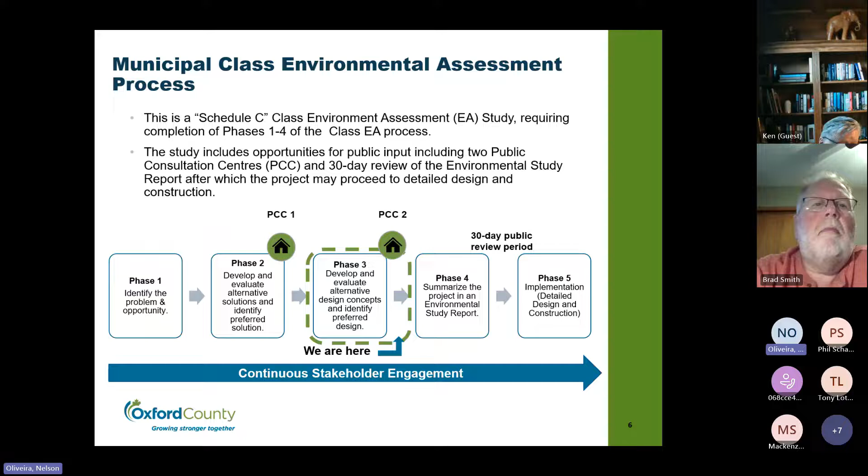All right, I'm going to step a little bit back here. I see a lot of familiar faces, which is fantastic, but I'm also going to step back to explain the system again. Some of this came from the public meeting before, so for those that have seen this, we'll get through this quick; for those that haven't, just want to bring you back on board. At present, the existing system is serviced by 3 wells. Of the 3, 1 is an overburden well and 2 are considered bedrock wells.

We service about just shy of 3,400 people, or about 1,289 service connections within the current settlement area. All 3 current wells are located adjacent to the elevated water tower used for storage, right in the heart of the town. It's not only used for storage, but it's part of the disinfection process, and it also helps meet the peak demands in the system.

The current treatment includes the addition of sodium silicate, used for iron and manganese sequestering. That's something you've got naturally in your water source, as do a lot of systems in Ontario. We also add sodium hypochlorite for disinfection.

Key items related to the existing system include the fact that the 2 bedrock wells, also known as wells 2A and 3, are not allowed to operate at the same time, a condition of the existing permit to take water issued by the MECP, the Ministry of Environment, Conservation and Parks. By taking 1 well off, that reduces our water supply capacity for Tavistock. Based on the larger well out of service, a means of establishing what we call firm capacity, this reduces the actual capacity of the Tavistock system to just over 4,000 cubic meters per day.

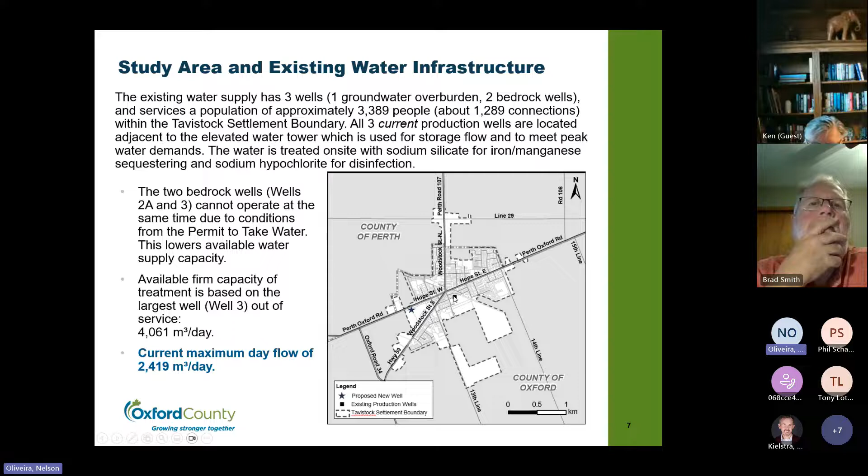The following provides a further overview of the specific problems and opportunities developed for this study, following the review of the existing system and based on additional inputs throughout the planning process. The reason we define problems and opportunities is to provide a basis to identify and assess our solutions. Solutions should look to address existing problems, and also provide opportunities to improve servicing wherever possible. So key elements are noted as follows.

The first thing is security. The current 3 water supply wells are in the same location, so the potential disruption to the facility, if something was to occur there, would have a large impact on the ability to supply Tavistock itself.

The next one is growth planning. With an additional residential of about 620 homes and employment of about 19 hectares, we need to make sure that we've got the ability to service that sort of planned growth to about the 2047 mark and beyond.

The county estimates suggest that max day demands will reach about 4,100 by 2046, exceeding the current capacity. If you remember what I said about firm capacity, that would already exceed it, meaning we would already have a deficit at that time.

The official planned population residential growth trends indicate the max day of about 4,114 could exceed capacity as early as 2036. So we need to really be ahead of this and understand that there's going to be a water deficiency at some point if we don't deal with this now, and it may stunt the ability to grow.

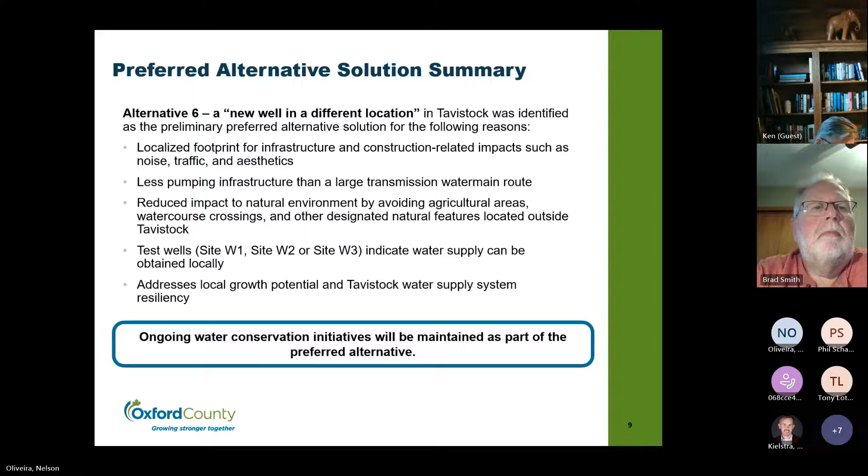So again, stepping back a little bit - based on the preferred servicing solution being a new well, further investigation was undertaken to evaluate the performance of each of the test wells that were advanced. As a result of that analysis, Site W3, adjacent to the North Optimist Park, was deemed the preliminary preferred location for the new well, for the reasons I'll quickly go through.

It maintained the preferred localized footprint, as we noted. More importantly, the well showed extremely good potential for supply - about 40 liters a second, with the possibility of even getting more out of it. And again, there were minimal environmental impacts, avoiding designated natural environmental features that some of the other sites had slightly higher concerns with.

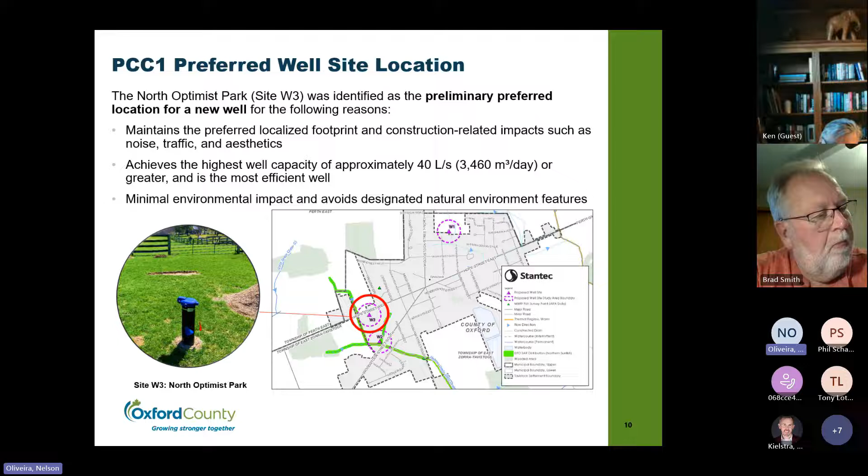So at the end of this slide, we're bringing us up to what we presented at the December 2022 meeting. For those who weren't able to attend, or as a reminder for those who were there and are joining us today, this launches the next part of this presentation. After we presented this, we solicited input - a lot like what we want to do after this presentation - and we did hear back from you. This is what we heard following PCC number 1.

The first question was about the land parcel where W3 is located, which was provided to the township originally for use as a road right-of-way. The Township of East Zorra-Tavistock permitted the use of the W3 property for testing purposes. We understood that long-term use of the property may affect further negotiation with the town, and that the property extents would be confirmed in later phases. These were the responses we provided at the time we reviewed W3. The county had subsequent discussions with the town that we can discuss later in this presentation, but that was one key question that came up during and following the presentation.

An individual also identified W1, used as the former town reservoir, and asked if it could be repurposed. County staff identified that the site was decommissioned due to water quality issues, and in fact it was less productive than the other sites, based on the updated pump test done about 1.5 to 2 years ago. So there are a lot of reasons we didn't really look at W1 as a preferred solution. With W3 having really good water yield, it has the ability to supplement the 3 wells that will continue to operate as well.

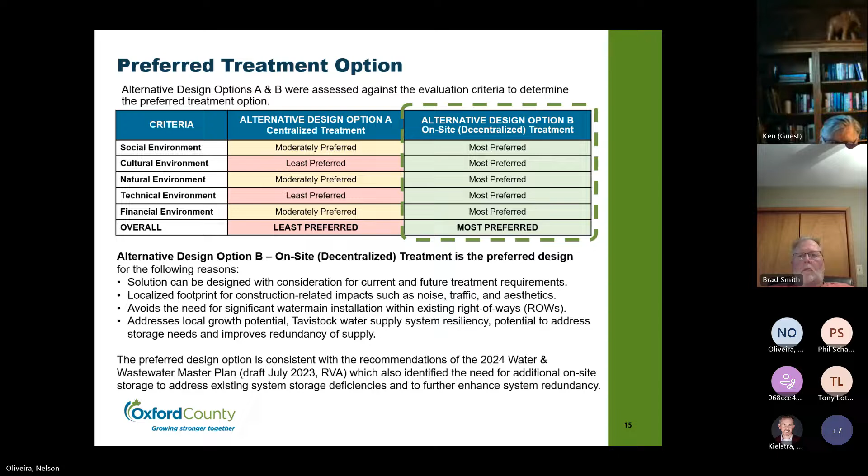All right, so based on the preferred servicing solution being a decentralized approach, we then evolved into looking at design concepts with that site. In total, we looked at 6 design concepts, with actually a few more because there are some sub-options, which I'll go through. I'll take the time now, and I apologize, it might get a little in the weeds here, but better to share this so everyone has a good understanding.

In this case, we'd have 2-stage pumping with an on-ground storage tank or standpipe in the back of the building. We would also use iron sequestering to deal with the iron and manganese discovered in testing, which is consistent with the other groundwater sources you have there. This would likely be the smallest building footprint, about 8 meters by 10 meters, except it would have the additional storage in the back of it.

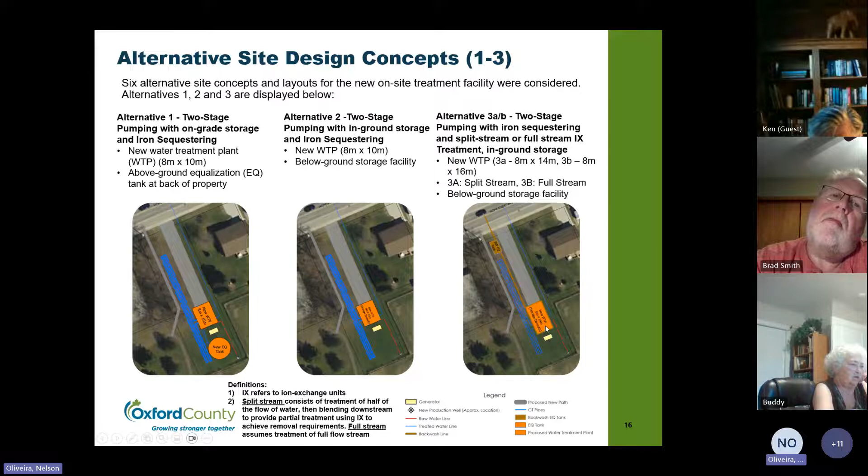So remember, this one was the in-ground option. As I go to the next slide, it's the exact same essentially as options 3A and 3B, where we've got the two-stage pumping, iron sequestering, which again is just injecting sodium silicate to essentially get the iron and manganese to not oxidize out, but stay in the water.

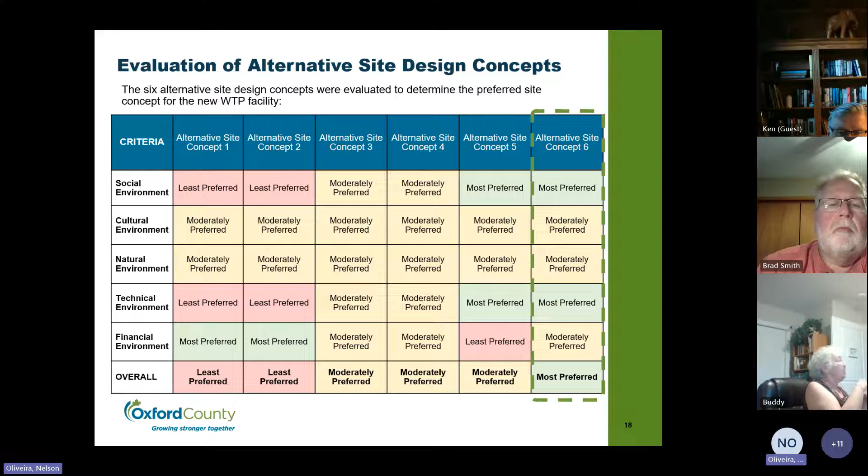In terms of cultural, you can see it's about the same because everything is on the same site. So generally speaking, not much of a difference there, nor in natural environment for the same reason. In terms of technical, as you can see, as the technology got a little bit better - if you can see my cursor - we went from least to moderate to really having a system that can meet today's needs for regulation with the ability to implement additional treatment if and when needed in the future. So it really scored well on technical.

Flip side, you can almost see the reverse to some extent on the costing and whatnot. So it's certainly not the cheapest alternative, but we try not to make decisions that are just based on cost. It has to have that best balance of what we call the environment, as I defined before. And for all of these reasons, alternative 6 was determined to be the preferred option.

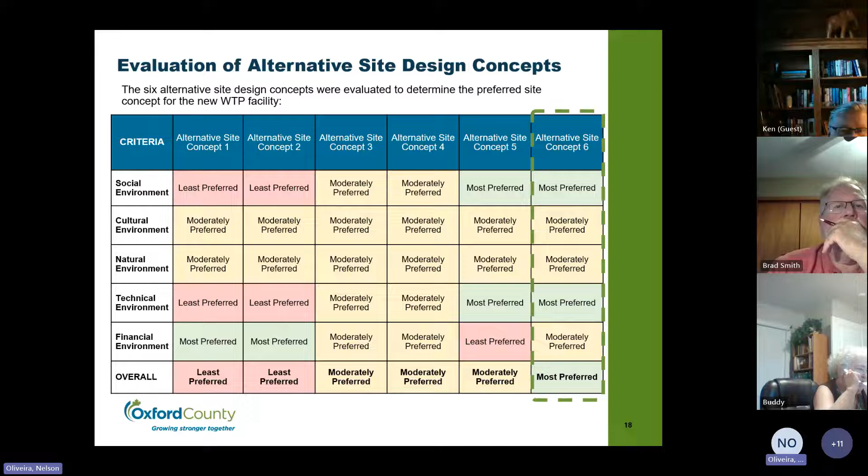And again, so we then looked at that a little bit further, because remember, 6 has both A and B to it. Based on the initial well water quality testing, it was determined that concept 6A, which was split stream treatment, provided the ability to implement future treatment processes if and when required to meet regulatory changes, and provided a lower cost solution compared to concept 6B.

The big reason for that is where we think we may potentially need ion exchange in the future, if it's ever needed, we just need to knock things down a little bit more. So full stream treatment really should not be necessary based on what's being potentially proposed by the province. Really that was the big difference. Because of that, we really don't want to put in more equipment than absolutely necessary.

It also increases not just the capital cost, but the long-term operation, because you've got more backwash water to deal with. You've got more media sort of material that you've got to regenerate and replenish with time and whatnot. And then there's several other opportunities.

So 6A still was able to address system storage. It provided the ability to potentially mitigate transient issues, and the reason for that is that we've got the storage right near, we've got pumping nearby, and the heavy user in the system's not too far away. So we're able to really provide that sort of pressure balancing in the system using this solution, which was part of the objectives. The catalytic iron removal - these are pressure filters essentially - is preferred over iron sequestering because the concentrations of iron and manganese in the raw water are a little bit too high.

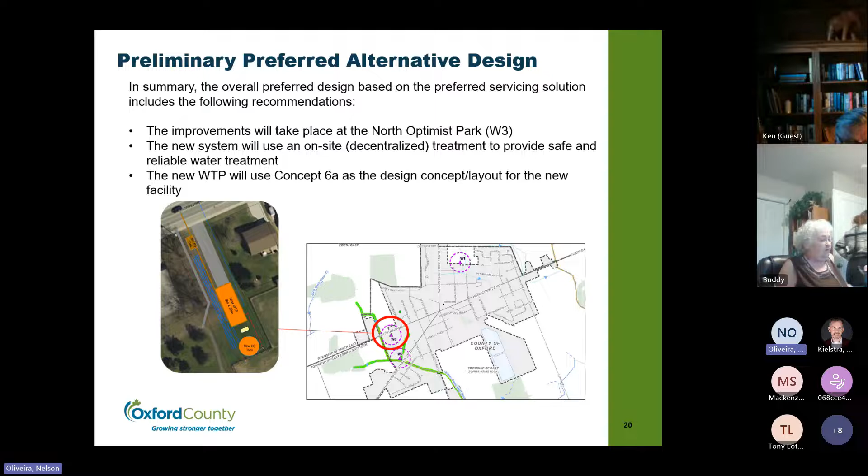As part of the EA process, it's important to identify other steps that need to be done prior to or as part of the later implementation phase—that's obviously the construction phase and whatnot. So we laid out a few other items that the county would be looking at.

In terms of wildlife and habitat, any species at risk that are identified, we need to confirm that they're not present at the proposed site.

Obviously, any construction and long-term operation has to consider noise. You've got the short-term noise during construction, but also things like generators and even the humming of buildings. That's all considered in the design element to make sure adjacent properties aren't bothered by any background noise.

Aesthetics is another element here—trying to integrate it. It is a municipal facility, but there are ways to set it back, as you saw on the plan there, and not have it in line, let's say, with the houses or whatnot. But these are all things that, as the county evolves the process later on, will get considered.

Archaeological resources—we do need to make sure that all sites, even if we think they're disturbed, are confirmed. And if not, a Stage One assessment would be undertaken. So that would be the next step.

Short-term construction impacts—I mentioned noise already, and vibration, air—these are all things that are part of the ESR document, so that as the baton is handed to the next process, which is detailed design, everyone remembers these are things we've got to consider to minimize disruption to everybody.

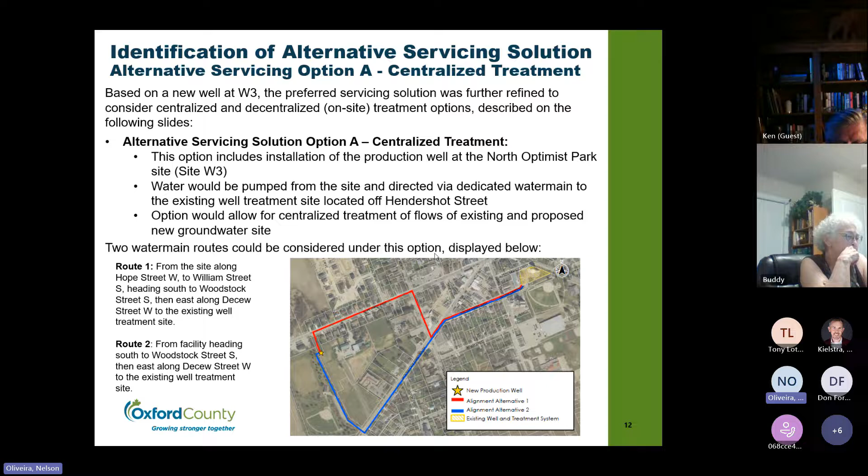Sure. So if you can still see the screen, let's go back here. This is where I broke out the centralized versus decentralized options. The centralized option had a dedicated raw water main that would go out to the centralized site and get treatment there, although that's a very, very tight site. With the decentralized option, treatment is at W3, and the connection would be right out to Hope Street.

With the preferred solution, the rationale for why it can better balance pressures is, first, the storage and supply is closer to that large user. Also, because there are currently pressure fluctuations related to when they ask for water - they essentially open a valve and then close it rapidly, sometimes causing pressure waves in the system - by having the facility a little closer, through design, they can mitigate those pressure fluctuations more. So the dedicated line to the tower was actually the centralized solution, which was not the preferred one.

So that pipe isn't part of the preferred solution - the focus is really on the site. You can see here this blue line represents more or less the treated water main exiting the building and tying into the existing water main on Hope Street, as the high-level concept.

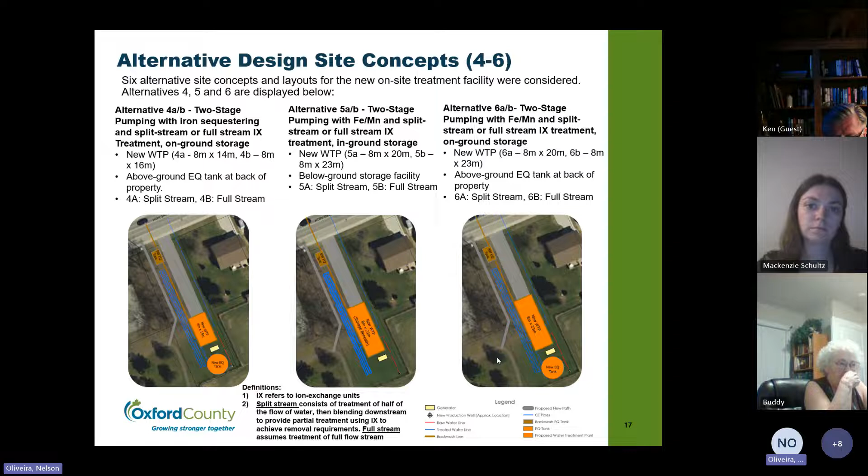And definitely I want to speak, because that little serpentine line I didn't really highlight, but it's important when we talk about storage. This is something the county and a lot of other municipalities use - it's all in-ground piping, so you see it throughout all the options. It's essentially the same. What happens is the water passes through here, it's injected with sodium hypochlorite, and passes through all this piping. The intent is that disinfection with chlorine works through what we call contact time - the longer chlorine is in contact with water, the longer it has to kill or inactivate things like viruses, which is the key thing we achieve in Ontario to make our water safe. The reason this is important is the more you do it through a system like this, the more any storage that goes in is fully dedicated to what we call EQ, or storage equalization, because you don't really need the tank to be doing the disinfection. You can basically draw down within reason and use that to supply customers as much as possible. So it's all kind of brought together as part of the net solution.

Thanks, Don, for bringing that up, because I did kind of miss that. It is part of that whole discussion in terms of fine tuning the design concept as it takes the next step.

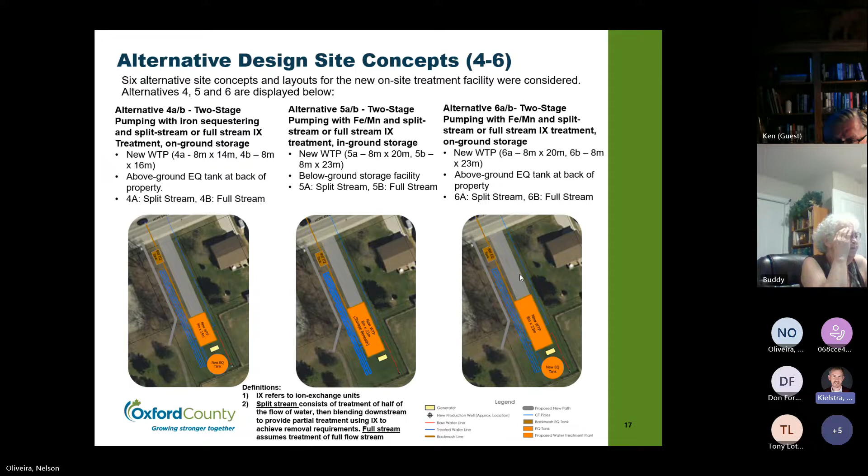I don't know, Nelson, did you want to throw up the preferred alternative again, just so people have another chance to look at it? Just the description of 6A, so people are aware of where we landed on it. Yeah, no, good point, David. It's a bit more zoomed in as well.

Just as a note too, we are showing a connection to maintain some access to the trail space as well, into the park off Hope Street.

There's one comment coming through the chat. I hazard to say anything about it. I don't want to scare the comment away.